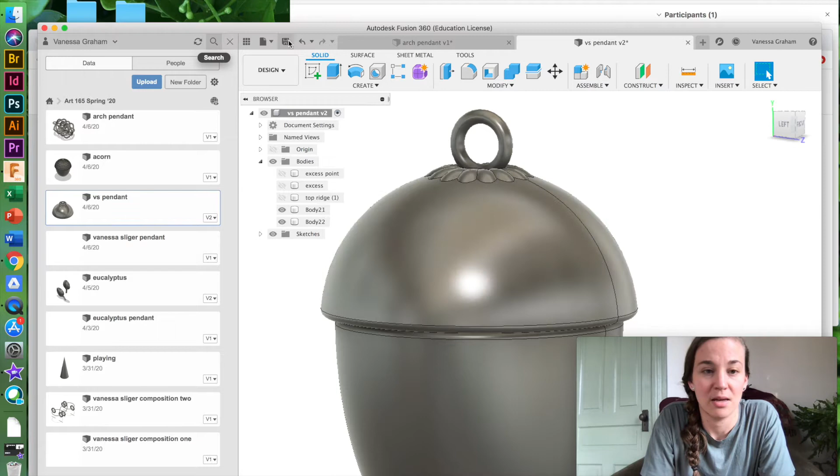I'm only going to be submitting one body at a time. So for this model, I've combined all of these bodies into one singular body right here, so this is all combined into one, so I save that singular body as an STL file.

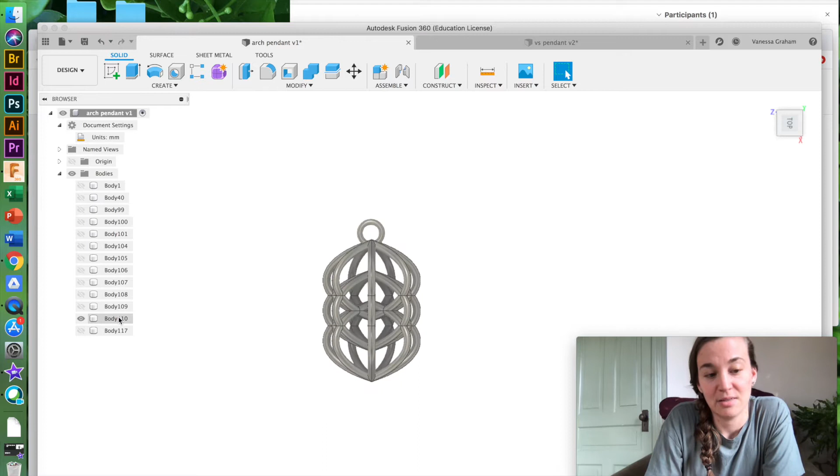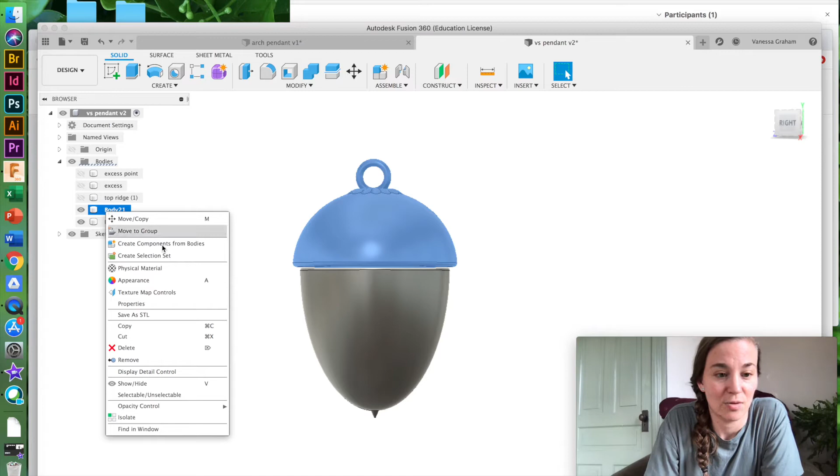For this pendant, I actually want it to be in two different sections, so the top piece and then the bottom piece, so they kind of fit together and create a little secret box on the inside, since it's hollow in the interior of this bottom half and in the lid as well. So I'm going to save them as two separate files and print them separately so they can fit together well. I want to save that as an STL.

Oh sorry, on the body, I'm going to right click it. I already did it, but let me explain it. Right click the specific body that you're trying to print, save as STL.

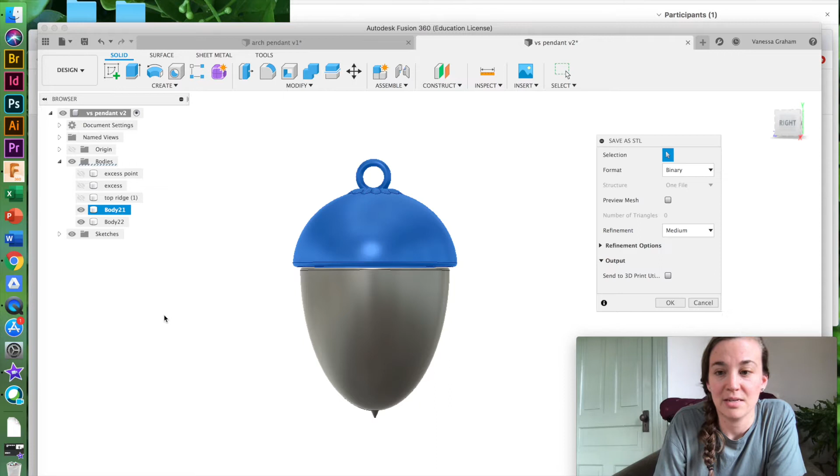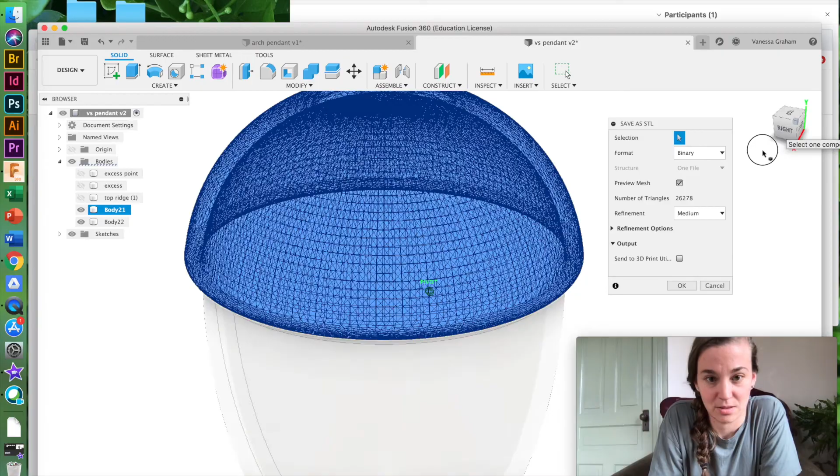So an STL file, you can imagine it like a giant fishnet being thrown over the surface of your model. It creates like a mesh type file. So if I wanted to, I could preview this mesh and you can see what an STL file actually is, a mesh-like covering of the surfaces of your model, made up of thousands of tiny triangles. So that's what an STL file is.

I don't have to preview it if I don't want to, but I do want to choose my format as binary, so it should be default set to binary, you don't need to change it. And then I have a few options with refinement, and that's going to change depending on what material I'm printing it in. I'm just going to do low for this.

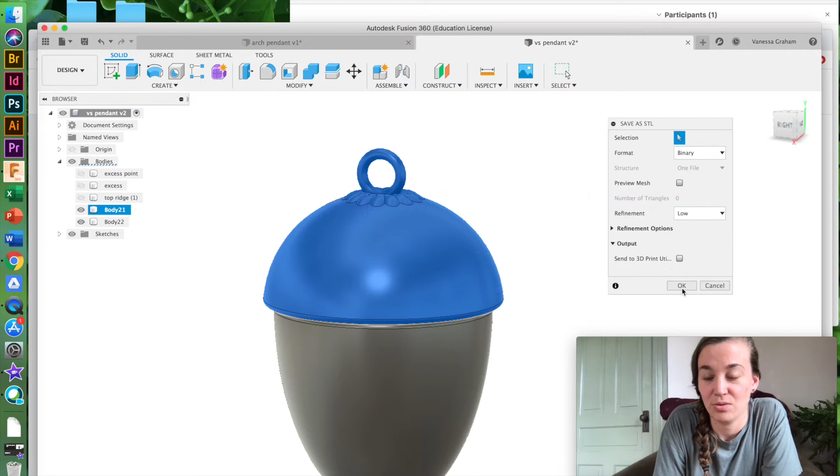And name your file, acorn lid.

If you have any questions about your specific model, in a specific material, and how you should save your STL, just let me know and ask me. Also on Shapeways, they have for each material a whole list of requirements for getting the best print, and suggestions for how your file should be laid out. You can view that on Shapeways.

But there is my STL file, three-dimensional file, made up out of a mesh geometry. So I'm going to go ahead and upload that. And I did.

Put me at the top. Okay, so it will take a minute to load up, but when it does, there it goes. They always spin around like that. So there is my acorn lid.

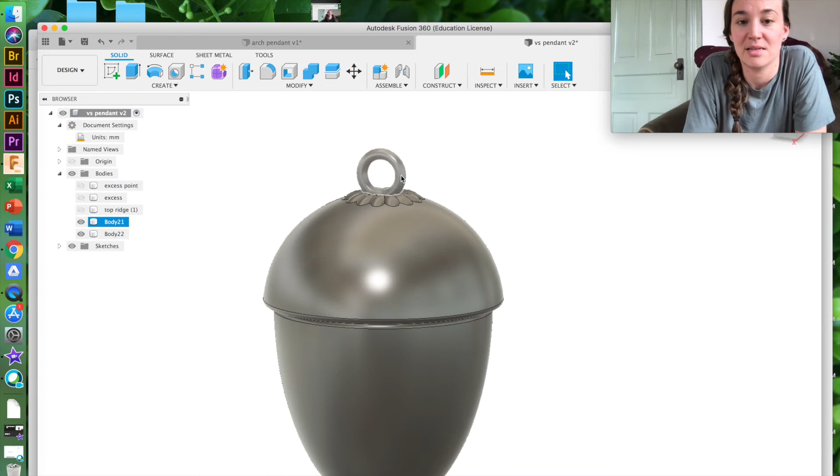And what else do we have? My torus is essentially a wire, so I do want to check that it's large enough. I can't remember exactly how big I made it, but I can go back in, edit my feature, and see that it's 3 millimeters wide and 1 millimeter thick right there.

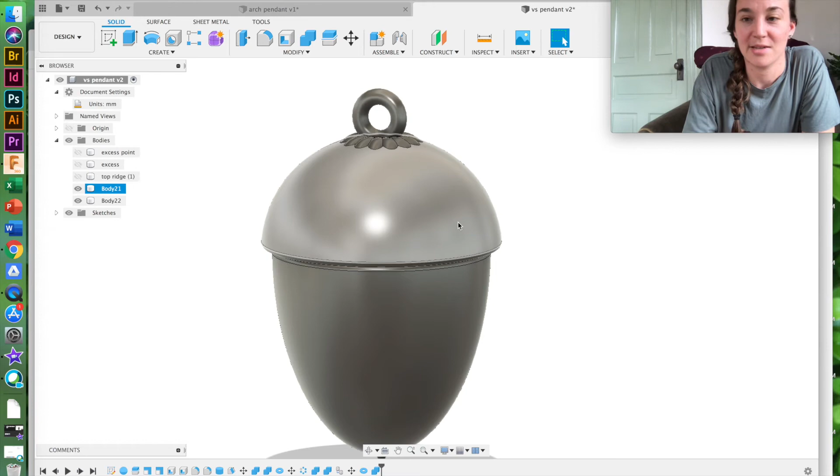So if I needed to change it, boost it up a little bit to make it fatter, I could do that, resave my STL, and upload it so that it will print a little bit more successfully.

Well, lots of requirements. Okay, let's go back to where I've uploaded. Once I've decided on what material I want and checked my 3D materials guide to make sure that my model fits the specifications for the specific kind of material I'm using, which I checked with the bronze, I believe. My wall thickness is in the right range. My torus is essentially a wire and it is in the right size range as well. So I should be good.

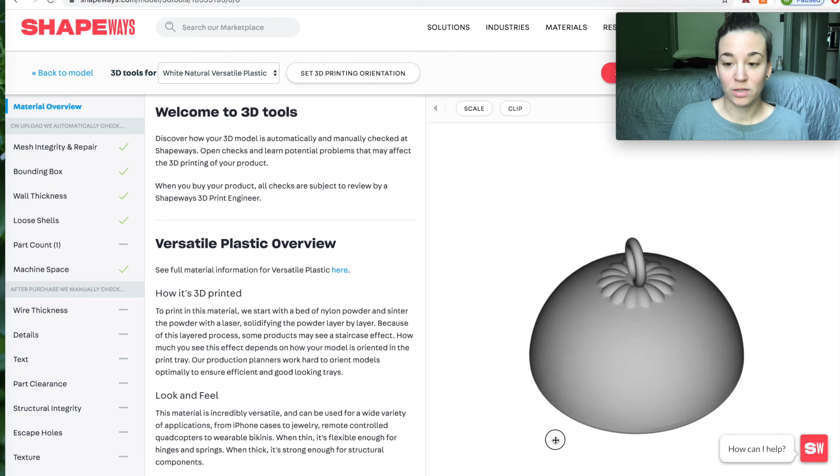But if I want to double check, I do have the option to go here under Tools and select Open in 3D Tools. Maybe. Come on. It's waiting. Okay, and that will open this into a new kind of template area, which really is just going to give you much more in-depth information.

So first I have to choose the material that I think I wanted, which was bronze. And it's going to give me an overview of the material, how it's printed. There's lots of different types of 3D printing. Depending on the material, it requires a different process. So it's going to explain that to you right there in case you want to know.

It also gives you the difference between the different finish options you have. So you can leave it raw and unfinished. I could choose polished if I wanted to. So this is really just a more in-depth explanation of your options and of the process. So when I do this, it's going to check and make sure I have followed the specifications for bronze.

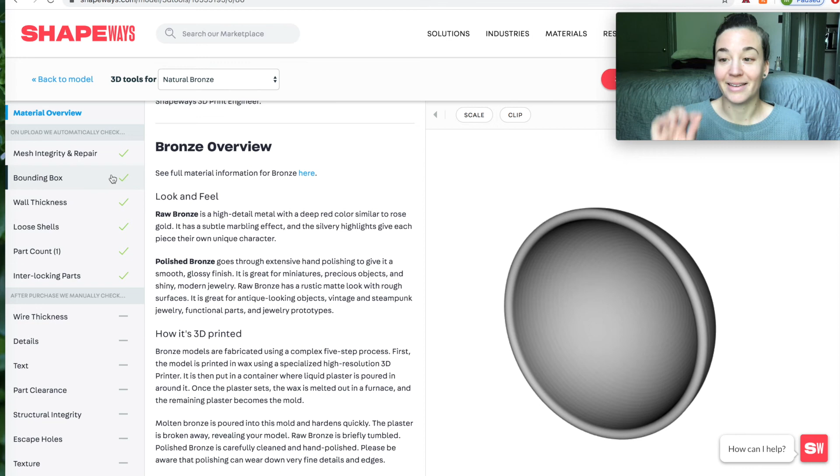So you can see that my wall thickness is right and all those other little categories that I didn't really touch on in the previous part of the video, but it will check all of these. So you should have a green check next to everything in order to proceed. If you do not, you'll need to go back and adjust your model appropriately.

So these are the automatic checks, and then after I put this in my cart and purchase it, they will do further manual checks to check all of these parts. And that takes at least an hour. Sometimes they get back to you really quickly, sometimes it's slower, but it will give you a diagnostics overview of your model, just a second check before they actually print it to make sure that it will print well. And if one of these categories is not working on your model, then they'll explain that to you and you can fix your model, update it, and go through the process again.

So yeah, it is very helpful to go into this 3D tools, and again you find that from the page where you uploaded your model, this tool section right there. Just double check, make sure you have everything right, and then again they will manually check your model after you order it.

So yeah, I can choose bronze. I can add that to my cart. I can check out, or I could add another model right there if I wanted to print the bottom half of my acorn. And then after you check out and continue, you will get a second notification that your model is approved and that it is going through processing, or that your model is not approved and that you need to update it. So yeah, I think those are the basics of getting your models printed at Shapeways.